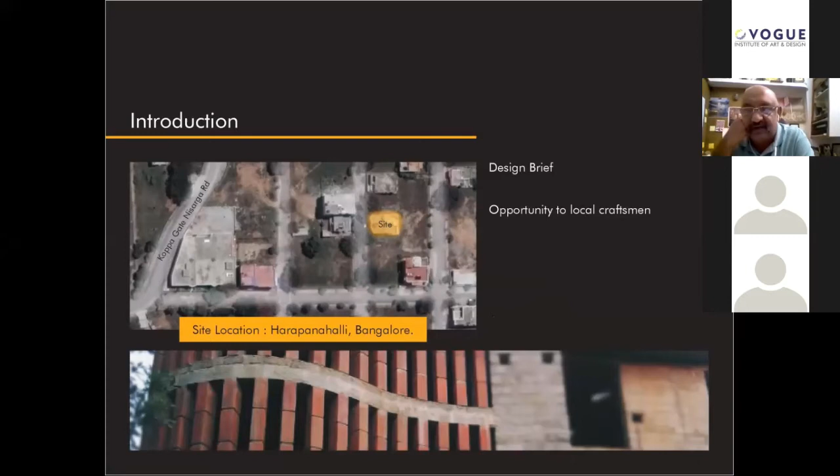We did it in 2014, on a 60/40 site in a private layout in a place called Harapanahalli in Bangalore. Here we had this opportunity to work with a lot of local crafts and local experimentation, not just in our structural system, but also in terms of our finishes for interiors and things like that. So you'll see what kind of drama it evolves into.

The floor plan is simple. There's a basement which we dug out, and it literally had the music hall and the entertaining space, with garden areas on two courts inside the house. There was also a support staff's bedroom and a bathroom, which was accessed from outside as well.

At the ground level, you enter into the entrance, and then you come into this lobby area. You can go down to the basement here, and then climb up one flight of steps into the living room area—the living room, kitchen, dining area, and a bedroom with an attached bathroom. Then you could climb up to the next floor into the son's bedroom, which has an attached bathroom.

The son's bedroom has a mezzanine floor for him to study. From this layer you can go up to another floor, which had the study, a balcony, and a bedroom with a bathroom. This in turn looked down into the three spaces—the living room and the basement garden area.

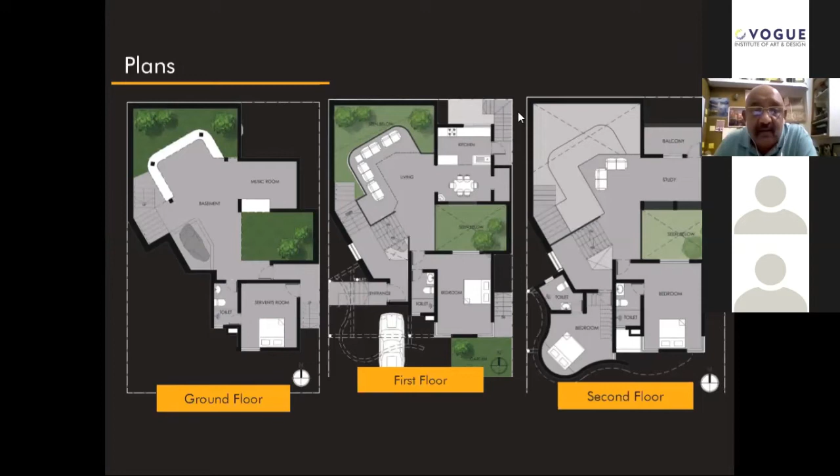Okay, now this is what literally happened, I think the same thing as what we showed in the plan. This is the facade. I never believe in designing a facade, I never believe in designing an elevation. The elevation becomes a part of what happens on the inside—it is never a part of what happens on the outside.

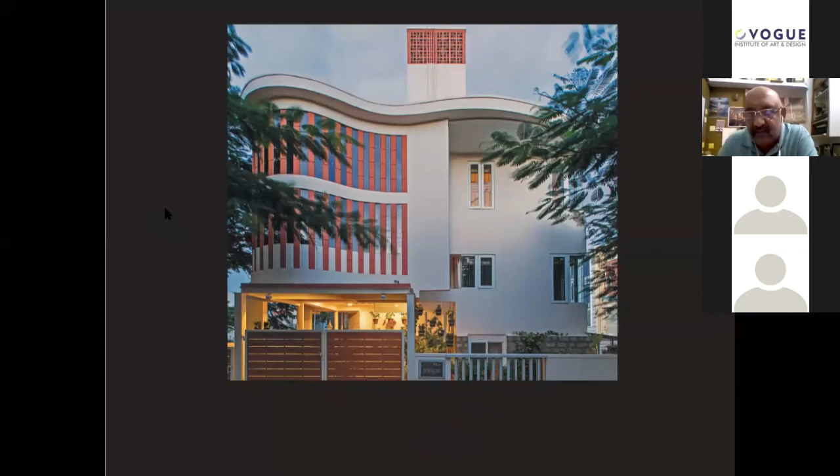Because I don't believe in doing something for somebody walking on the road for 5 minutes and then just looking at it, not even being respectful for that space. So this is something which evolves because of what happens on the inside, right?

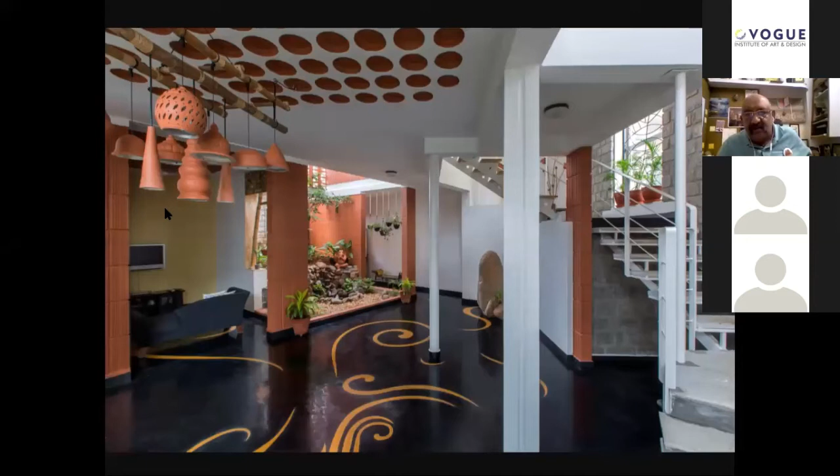This is the basement floor. If you really look at the kind of spaces we've created, there's a lot of green space. We work with a lot of landscape, we work with a lot of natural light. All the pictures you see, I think most of the photographs, are with natural light.

There's no artificial light in any places. Most of the photographs you'll see on all our projects are naturally lit photographs. So we try and see that every spot in the house is taken care of in terms of lighting.

The roof, what you see here as red circles, are filler slabs. If any of you want to know more about it, do put it in the pinned board in the chat box, and we will try and answer that later.

The flooring again is an oxide floor—instead of red oxide, we used black oxide. We got a beautiful artist from Kerala to come and do this floor. This is a black and yellow oxide mix, so you can create some beautiful drama with that. That's where, as I told you, you create theater with a material—you have oxide and you start creating theater with it, you start making it dance for you.

This is the living room space, where every material here—say for example, the railing—is done in bamboo. The furniture is all done in rubber wood, which is a byproduct of the rubber industry.

You look down to the basement garden space there. We got a Gond artist to come and paint that wall—we got that Gond artist to come from Madhya Pradesh to do this artwork. We said let's employ artists so that their art is also sustained. So this is one such space which we designed.

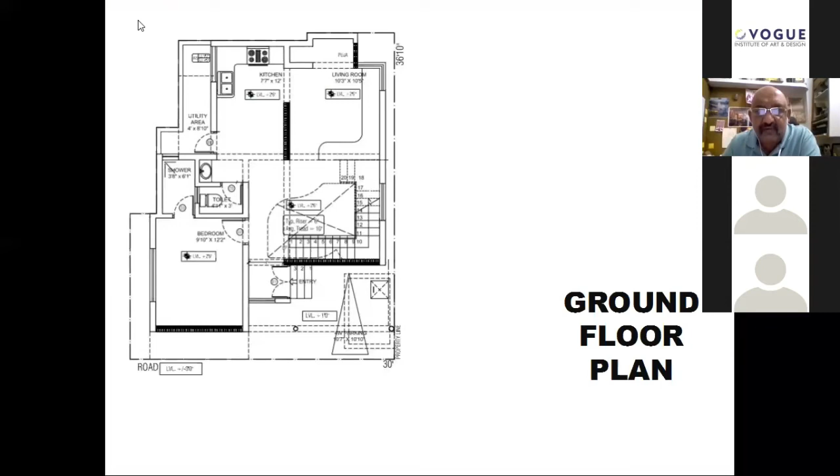This is another house we did in Bangalore, a very, very tight house — 30 by 36 feet, with the rear becoming around 22 feet or so. They needed a 3-bedroom house. It was for a professor.

He's a professor of physics, and we are presently working together, myself and Professor Raghavendra, on setting up one of India's biggest science centers — I'd say in Asia — on close to 220 acres of land, where ISRO has agreed to give a PSLV launch rocket for display, and DRDO is giving retired armed vehicles for display. We're doing a lot of interesting work with Mr. Raghavendra under the aegis of the Karnataka government, working with IISc, and I'm building the project report along with him.

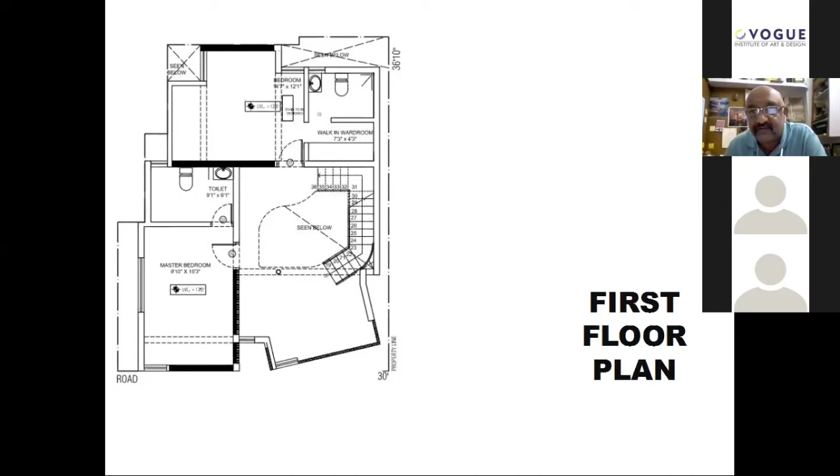So this was for his house, a 3-bedroom house, and what you see on the facade is actually the library. Each of these squares is a book rack at the backside. Because he's a professor and reads a lot, he needed space to keep his books, so we created niches for him to keep all his books.

We said, just like the way we fold the corner of a book when reading, using it as a bookmark, why don't we create a nice palette of the bookmark on the facade? We started working with ferrocement — one of our first experiments with it in this project — and created this amazing fabric of cement, exploring grays, whites and blacks to talk about the library. Otherwise, if you look at it, the building has nothing in terms of a facade.

You've all been taught in school that whenever you're laying a brick, there should never be a vertical joint. But we questioned that and said, why can't it be? If I can really visually build that vertical joint and handle it structurally so the load bearing happens differently, can I make a vertical joint?

We started exploring that a long time ago through our projects. This block I use is what we call a Hourdi block. It's made of clay but has around 6 holes on the inside, so it's a beautiful insulating material, and it uses 1/6th lesser topsoil than regular brick making. India on average consumes 7,500 hectares of topsoil every year just for manufacturing bricks, and we're trying to make our own small impact and bring in that change.

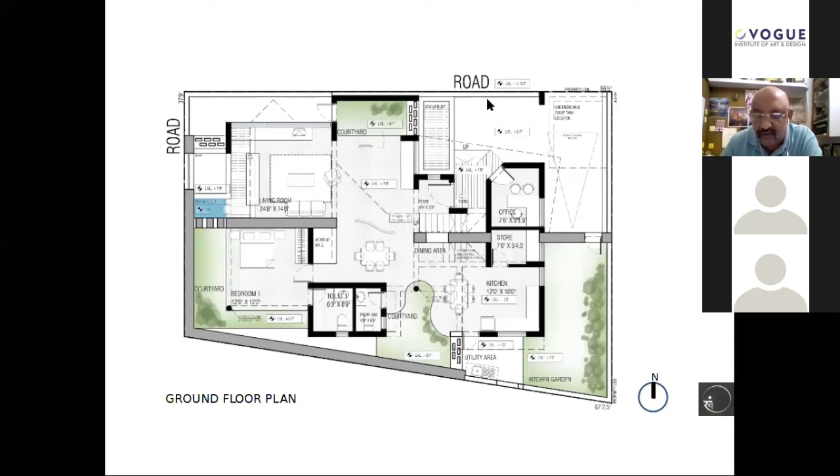So we used that simple concept, allowed air to come in, collect water vapors, blow through, become cool, enter into a courtyard and then enter the building. This was a triple height space. There was a wind catcher here which took out all the hot air and threw it out - you can see this square box. It threw the hot air out on the top and on the sides. Even the water tank had to have the same jali effect.

So look at your own houses in Bangalore or any hot dry place - in summer, your water tank gets hot. Just imagine what happens in a place like Ilkal. So we used the same concept of jalis all around the water tank to keep it cool.

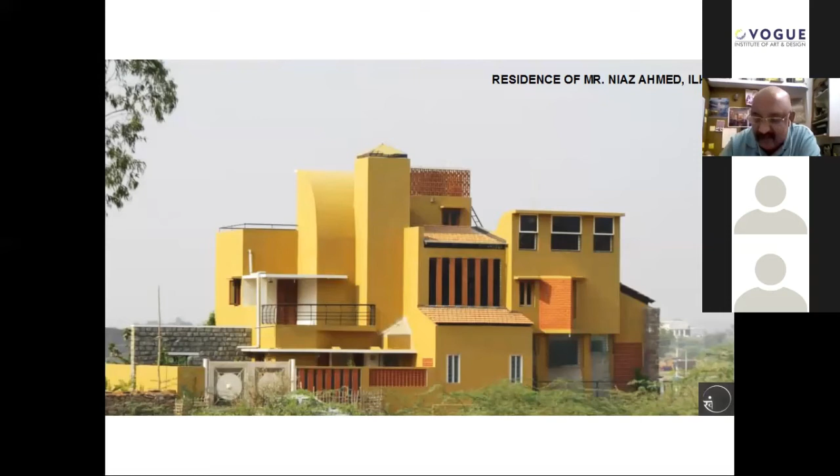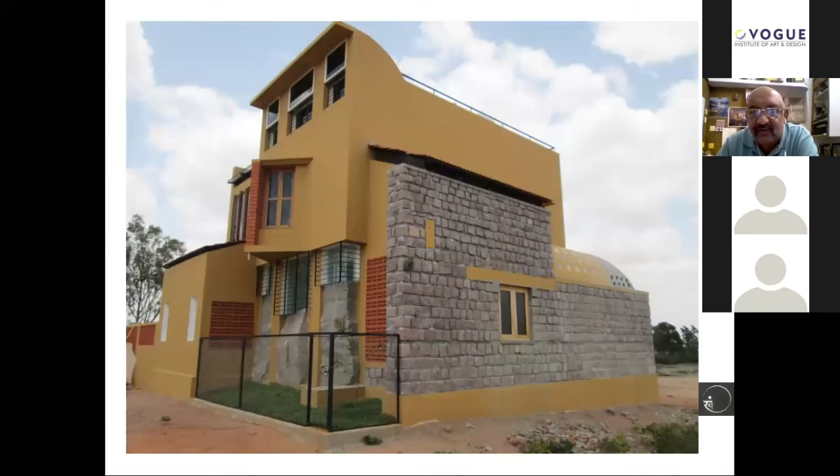This is the upper floor, which had a family room, 2 bedrooms, a toilet, and 2 courtyards. All the stone you see, most of the material was from the debris which we got from his land, from his quarry.

There's another place in South Bangalore called NR Colony. A very good friend of mine, Kannan Sarangpani, now has a wonderful cafe on the ground floor of this place called Eat Repeat. If you are foodies and would like to enjoy puliyogre, sakar pongal and ambode, traditional food, do visit that place. They serve some yummy, out of the world sakar pongals.

So we were doing this project, and we started questioning with this client. This client was willing to experiment with us. Jayalakshmi madam or Shilpa madam, if I'm crossing my time, please let me know so I can speed it up. Sure, sir.

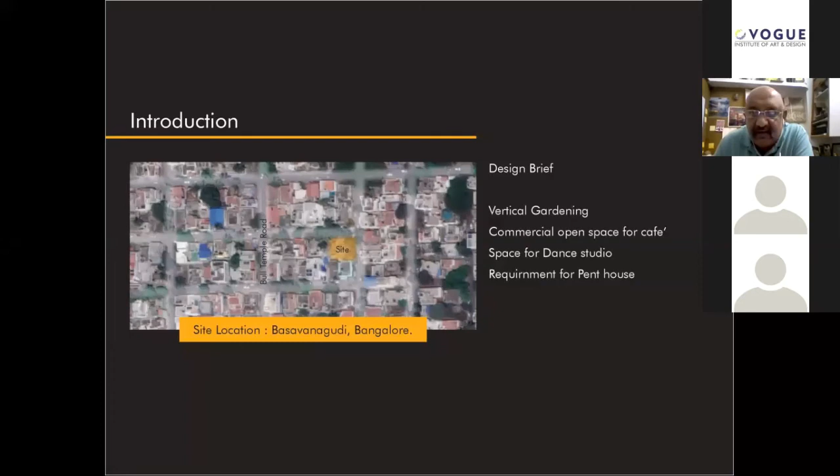So we were talking to this client, and we said, can we explore steel construction? Because steel is at least one material which does not end up in a landfill. It gets recycled and goes into another process for the longevity of the building. I'll speak to you a little later about what we call the cradle to cradle and cradle to grave movement, and we were trying to see whether we could get into this cradle to cradle concept, which is more environmentally friendly. So this was basically the brief.

The ground floor was supposed to be a dance studio, and the first floor was supposed to be a 2-bedroom house for his parents, and the second and third floor was supposed to be a 3-bedroom duplex for themselves, with a terrace for their terrace garden and solar panels.

The ground floor got converted into what you call the cafe now. The dance studio is not happening there. And we all said, don't change it to a dance studio again, because we want that puliyogre back. So the remaining brief continues.

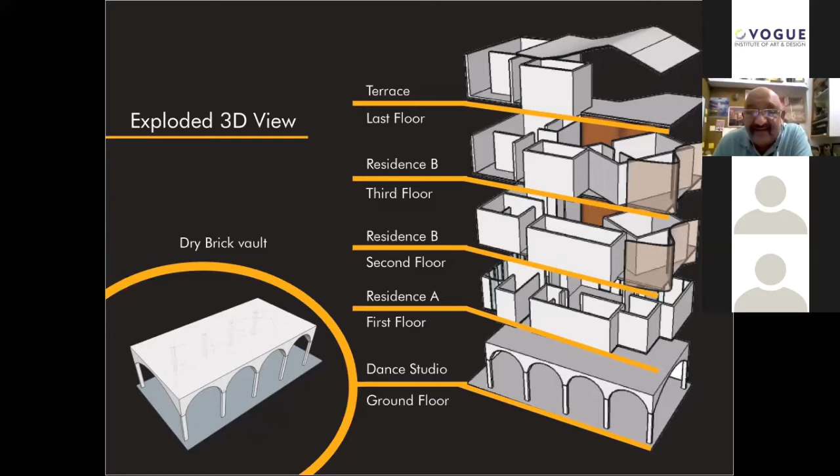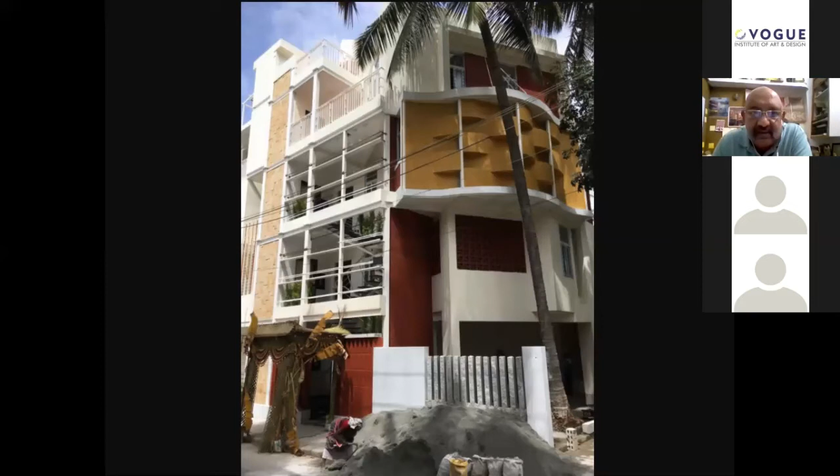We said, let the whole structure be done in steel, so I can unbolt this whole structure and reuse it. This is how we built that structure - a complete steel structure. Then we put the slabs and worked on it. What you see in the front, which is basically something like a ribbon, was done out of waste material of the site. It was done at the last, and whatever material remained at the site, we used to build that space.

And this is the puja room. We said, if the puja room is to be there, why should it sit on the ground? God, if you believe in this idea of God, let God elevate - levitate, right? So what we did was we kind of suspended this. If you look at this space, it is not standing on a column.

If you look at this, there's a beam which goes in like that, then it becomes a column, and then it gets tied up from the top. So these two slabs are literally suspending from the top floor, and then it floats in the building - it is not literally being supported from the bottom. It was a very interesting experiment.

So when any other client would have backed out and said, no way, I want something which has already been done - but when I spoke about this with Kannan, he said, wow, let's go ahead and do something like this, let it be unique. And then we came up with this beautiful mesh and lath plaster work. I'll show you the inside pictures of this.

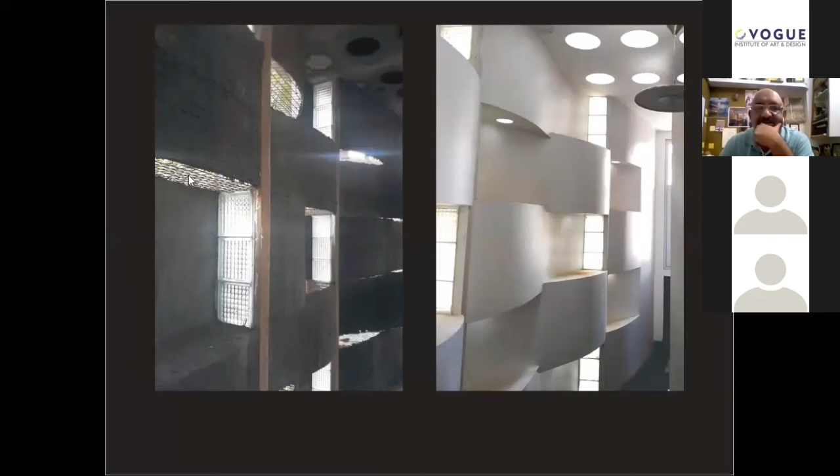This is the construction system which we followed there. Just showing you how we used all the waste steel, the clay blocks, PVC pipes and other things.

I will introduce you to this idea which I'm now getting into, called the Hampi Center of Design, and then I'll take you on to one more project. Hampi Center of Design is a center which is going to be in the next part of my life, which I'm working on right now. We've set up a Center for Design Dialogue, open for all designers to come and participate, dialogue, interact.

We've already done a lot of workshops. We've done a workshop on this idea of tensile architecture - how do you find form using nature? So we have this nature-inspired design thinking workshop, which we have now started online, every week. If any of you are interested, I had already sent across with Madam the link for this workshop.

So we are looking at how nature helps us, because if you look at nature - even Earth's evolution, I'm not talking about nature as the universe, but only our planet Earth - Earth, for it to have evolved, has taken close to around 4.5 billion years of existence, of evolution. Whereas we as human beings, we have a known history of around 50,000 years, which is hardly a blink in Earth's evolution.